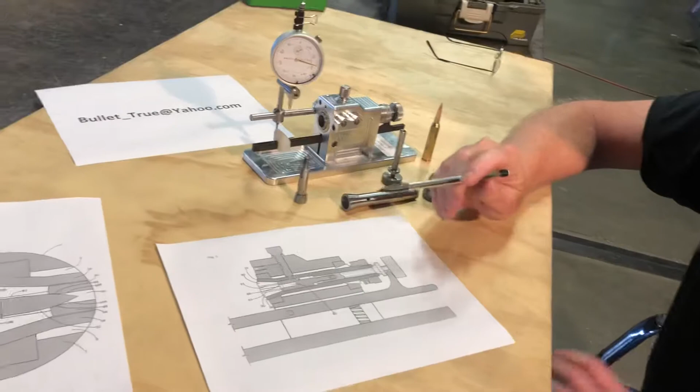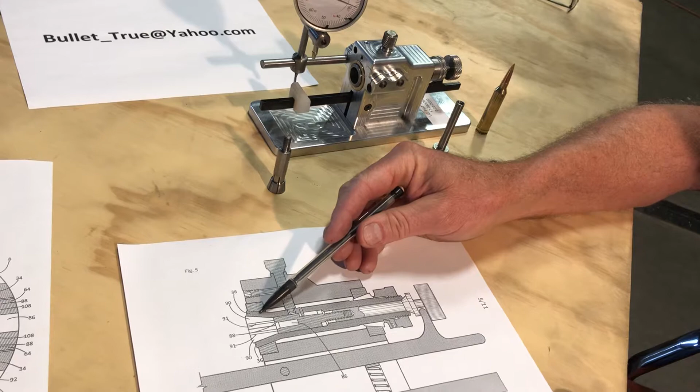First, you've got the drawings here. You can kind of see this is the drawbar, or the collet in here, which would be this part. There's the collet. And we have the spindle. There's a tapered spindle on this end, and it goes back here and is threaded for the adjustable tapered spindle nut.

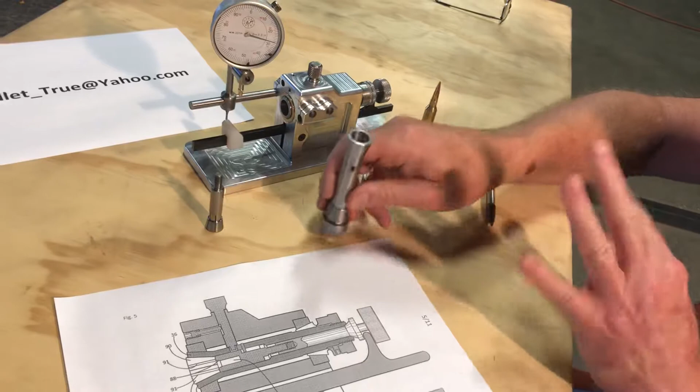You can adjust your bearing tension. These are the bearings, bronze bearings. Once you get it adjusted in the machine, it is exact. There is no ball bearing play or anything. You can make it as tight as you want.

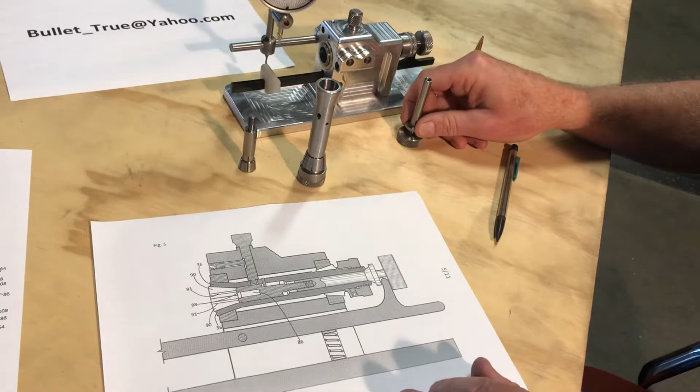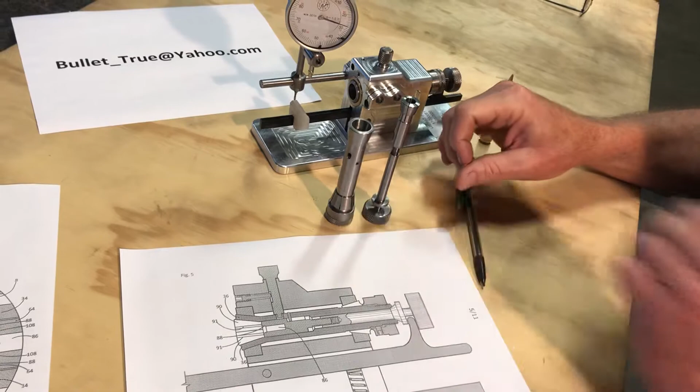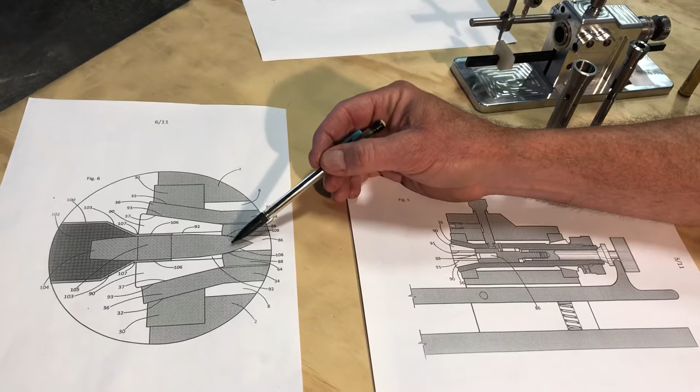Then we've got the drawbar. This part here goes inside the spindle, and that screws to the collet to draw this taper inside of the spindle taper, clamping the neck of your cartridge. And like I say, the inside of this collet is shaped to center the ogive of your bullet up here.

The collet only clamps the neck of the cartridge. Therefore, it must be a turned, fire-formed neck cartridge.

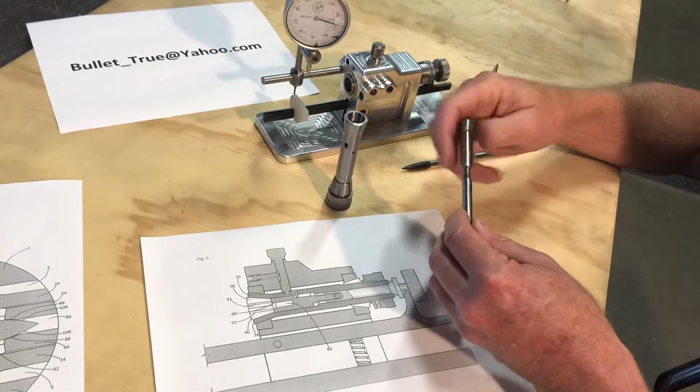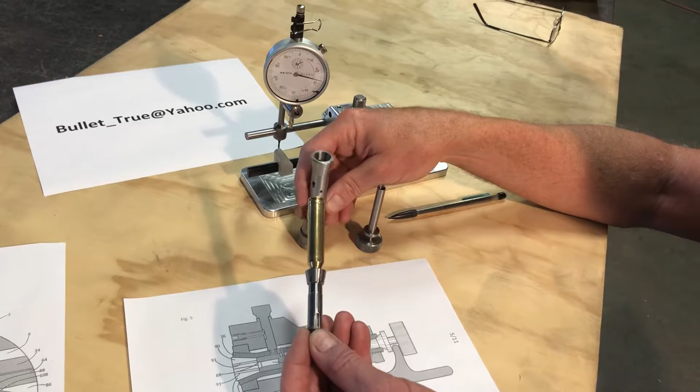You can stick some of these parts in the machine. Cartridge would go in. The nose of the bullet is centered in this collet, centered in the spindle. When you draw it up, the collet clamps only on the neck, centering the neck and the ogive of the bullet concentric with the spindle.

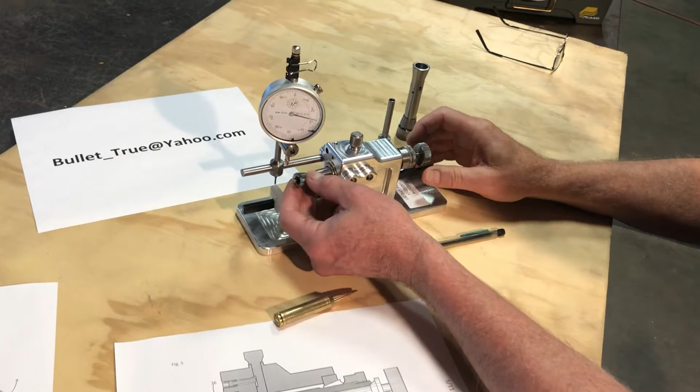So let's just stick it in there real quick. Move these other parts out of the way. Just like video 2, I believe. Put this collet in, you'll feel it drop in on the pin. Screw the collet in a little ways. You don't want to bottom it out with nothing in it. Insert your cartridge, hold the butt so the ogive is against the centering part of the collet. And then go ahead and tighten it down.

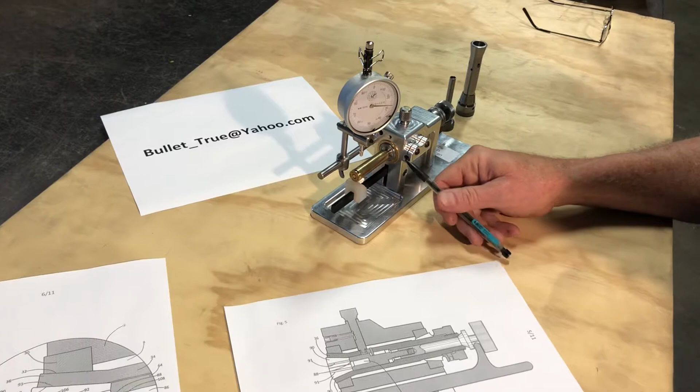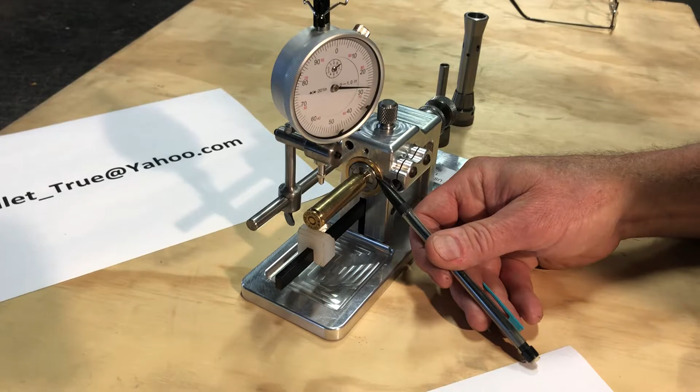And you're ready to adjust concentricity. You can see the bronze tapered bearings on the front, right there. The spindle face on the rear, basically the same thing. You have the bronze tapered bearing and the adjustable spindle nut to make it 100% concentric from the spindle clear through to the tail of your bullet.

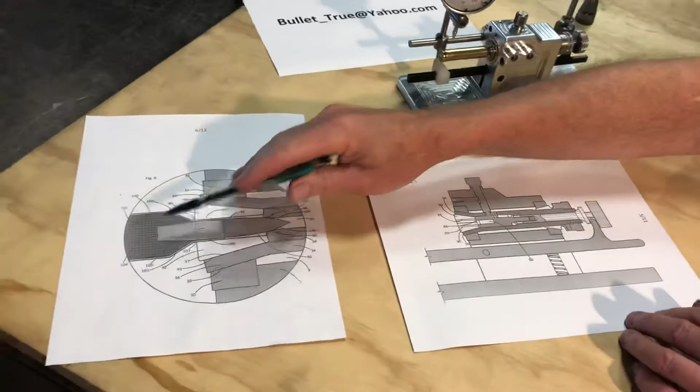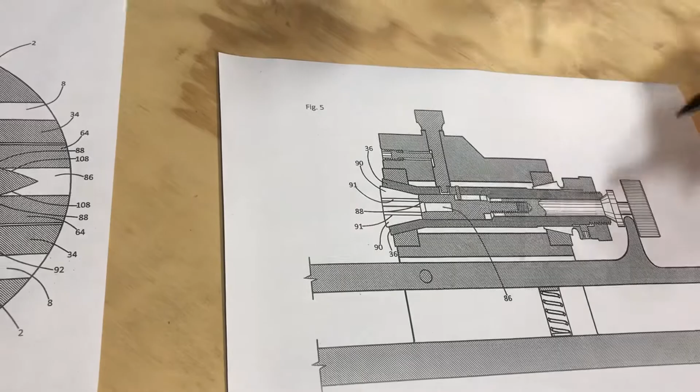I guess that kind of explains the internal workings. Your spindle lock, this is a spindle lock with a detent on it, and it drops into the detent holes on and around the spindle.

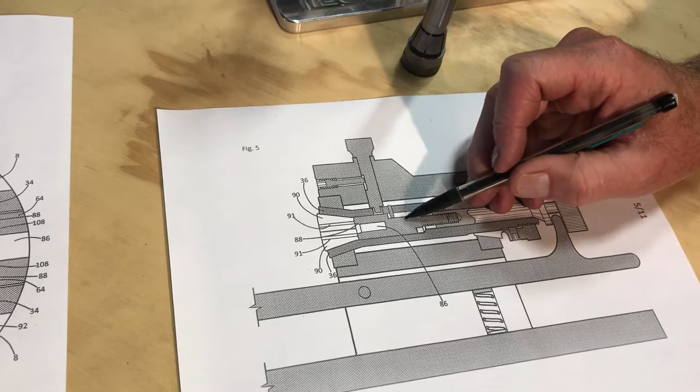This hole here would be the pin that the collet slot fits. I've already got it in there, but anyway, that keeps your collet from turning inside the spindle. So that kind of explains the internal workings.